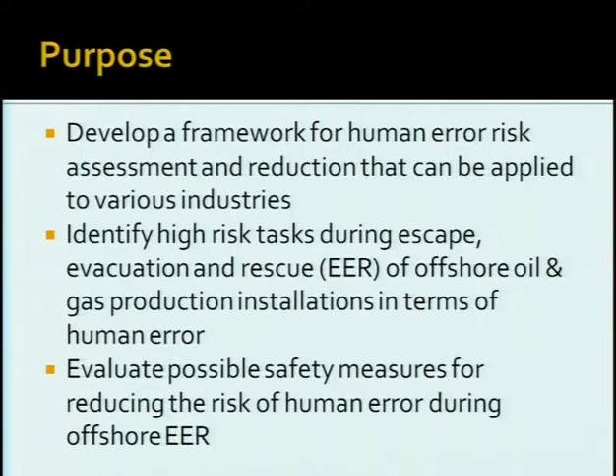And through that research, we've identified high-risk tasks during the escape, evacuation, and rescue process, the EER process, of offshore oil and gas production in terms of human error. We've also included a tool to evaluate potential safety measures for reducing the risk of human error during the offshore EER

process. So the escape phase of EER we've defined as the time of the initiator, be it a hydrocarbon release or a fire and explosion, until arrival at the temporary safe refuge or muster point. The evacuation phase is the time of the offshore installation manager's decision to leave the rig until a safe distance has been achieved from the platform. And rescue is the time of recovery actions from rescue personnel on nearby vessels.

Now, these three phases can coexist at the same time. For example, in the escape phase, if an individual who is moving toward the temporary safe refuge determines that there's no longer a safe path, they can initiate the evacuation phase for themselves and move towards evacuation.

And indeed, the rescue process can occur as soon as the initiator occurs and the escape phase has begun, just to prepare for any individuals that will be evacuating to sea or prepare helicopters for helicopter evacuation.

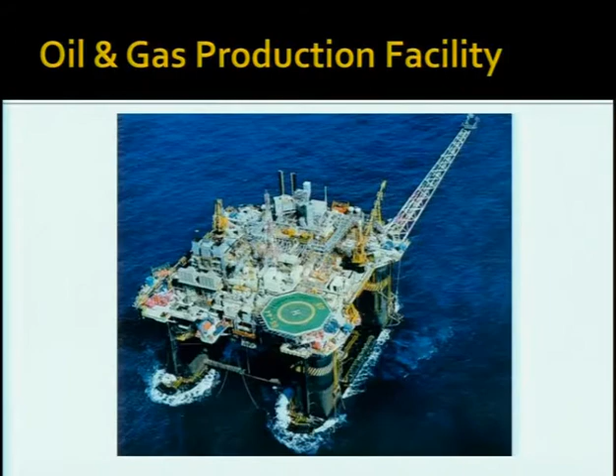So in the human reliability analysis model, the first step is to identify the emergency tasks that personnel must complete and scenarios that may occur. When these scenarios and tasks are identified, then you determine the human error probability for each task, as well as the severity of any consequences of an error.

You combine the human error probabilities and consequences in a risk matrix to determine the tolerability of risk, and then a risk graph will determine the requirements of any safety measures, or safety barriers as they're also called, in order to effectively reduce the risk.

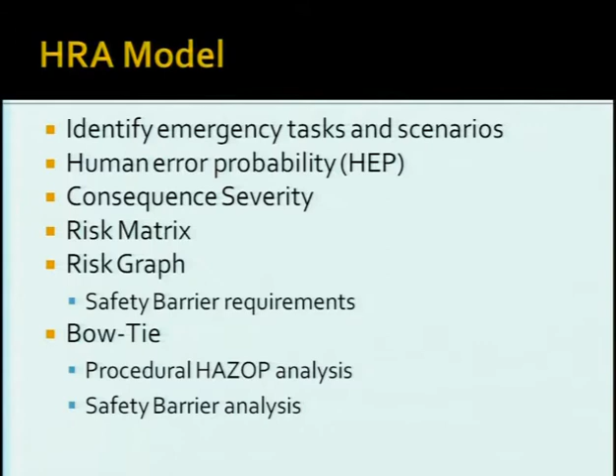As you can see, the first step is to choose your initiator, be it a gas release or a fire and explosion. So basically choose your scenario. And the second step is to choose your task to be evaluated. And conjointly, you determine the human error probability and consequences, and they combine together in the risk matrix.

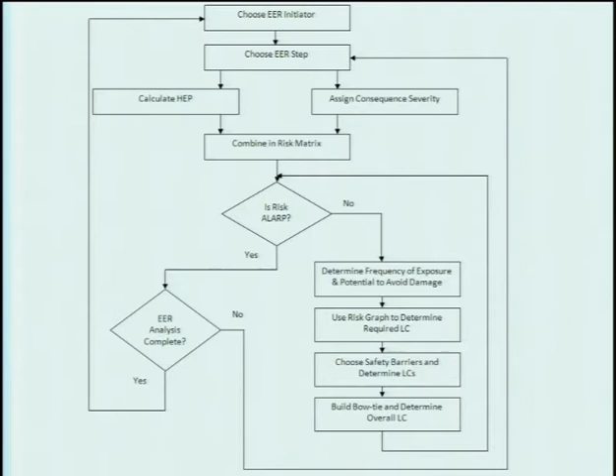Now, in the risk matrix, you determine if the risk is at a tolerable level. We use the as low as reasonably practicable principle, which I'll explain later. If so, then you move forward to the next step and just continue through your scenario and task analysis. If the risk does need to be reduced, then there is a separate risk reduction methodology included.

So to identify the tasks and scenarios, we use the hierarchical task analysis tool, which identified emergency procedural tasks for personnel. The hierarchical task analysis starts with the end goal. In our case, it was the end goal of escape, the end goal of evacuation, and of rescue. And then they're divided into smaller tasks that can be more detailed and evaluated for human error probabilities.

Scenarios have to be plausible scenarios. They have to be reasonable scenarios that could happen at the facility. And they have to encompass all levels of emergency situation, from minor emergency to major emergency.

So the evacuation tasks in specific were divided into different means of evacuation. You have a bridge link to other platforms, helicopter evacuation. You have a motor-propelled lifeboat, the totally enclosed motor-propelled survival craft, TEMPSC for short. You also have floating life rafts, or individuals, if there are no other means available, can jump directly into the sea with survival suits.

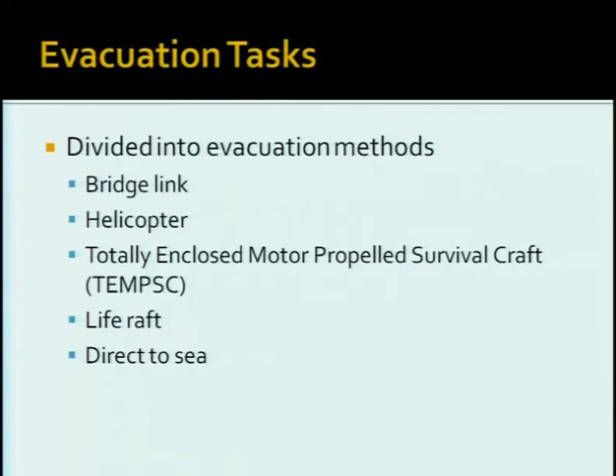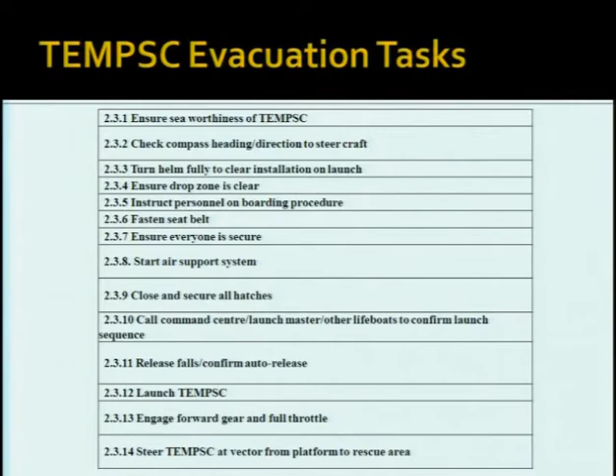Now this is just a breakdown of the specific motor-propelled lifeboat evacuation tasks, just to give an idea of the detail. You can notice one step is individuals must fasten their seat belts. Another is all hatches must be closed and tightly secured. So this just gives an example of some of the types of tasks, whether they be simple actions or cognitive tasks. Just the detail that can be gone into for determining human error probabilities and for consequences of errors.

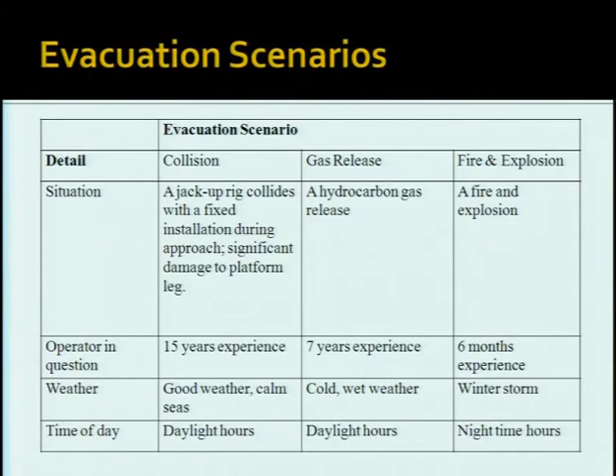Now, the human error probability we evaluated as the probability of an error in a group of people when a specific task is attempted. This is analogous to if you look at the emergency escape, evacuation, and rescue process as its own safety measure or layer of protection, then the probability of failure on demand is the human error probability.

Human error probabilities can be evaluated through reliability data. There are some databases available with generic data that need to be made facility specific to get a more realistic view of the risk. One method of getting facility specific data and scenario specific data is using expert judgment techniques. Two of which I'm going to talk about are the success likelihood index methodology and the human error assessment and reduction technique, also known as HEART.

So SLIM, the success likelihood index methodology, was used in the analysis of the escape phase, and HEART was used in the analysis of the evacuation phase. SLIM is a resource-intensive method. It requires multiple experts and assessors to generate one set of data. And HEART is more resource efficient, designed to be used by a single assessor to come up with a complete set of human error probability data.

SLIM has some minor calibration involved, and HEART calibration is an issue. It doesn't have its own internal calibration. In SLIM, each of the multiple assessors, all of their data combines for one set of results. So there's statistical analysis involved, and it becomes a less conservative technique, but perhaps a more robust technique.

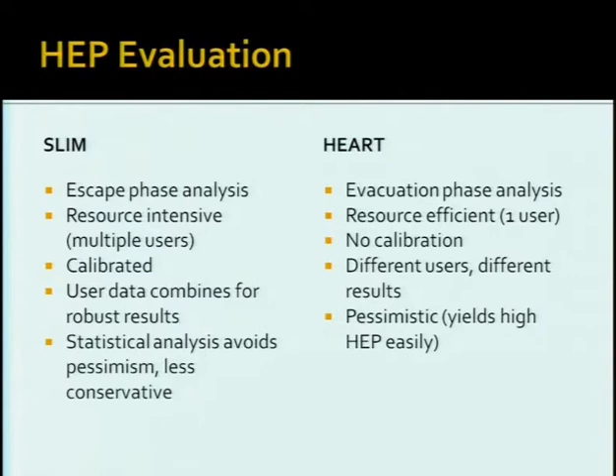Now, there are 4 categories. There are also 4 levels of severity, 1 to 4, 1 being the lowest and 4 being the highest, ranging from 0 effect to fatalities, or prevents other individuals from having a dry evacuation, from evacuating without having to go directly into the sea. Now, for the evacuation phase, only the health category is considered. They have the same severity levels, but the other 3 categories aren't included for evacuation.

Consequence severities were determined from previous incident data, from major investigations through industry in past years. The escape phase, it was determined, was very dependent on the initiator, whether it be a hydrocarbon release, a fire and explosion. Man overboard scenarios were also analyzed in the escape phase.

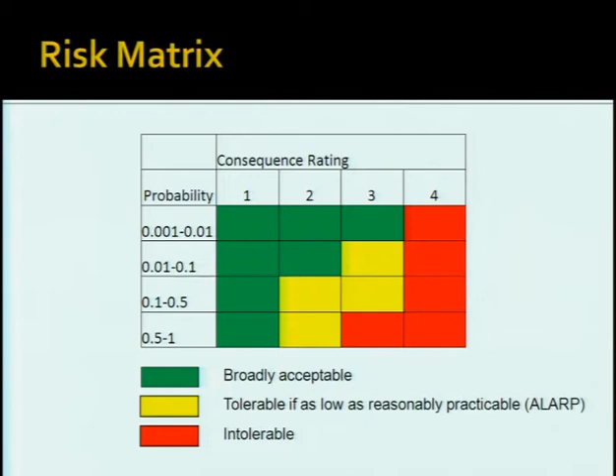So in the escape phase, as can be expected, the highest risk tasks were determined for the fire and explosion scenario, which is the most severe scenario. Most urgency is required. The lowest risk for the escape phase tasks was determined for the man overboard. Indeed, the muster to a temporary safe refuge had little effect on consequences for a man overboard scenario.

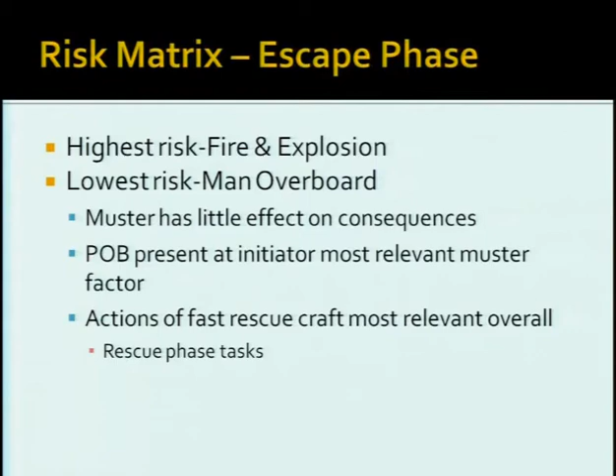There are tasks involved in the escape phase that include providing aid to others as necessary or as directed. So that task in the escape phase analysis becomes very important for a man overboard scenario, especially for the personnel who are present when the individual falls overboard. The other important phase for a man overboard scenario, of course, is the rescue phase tasks.

Now, for the evacuation phase, the highest risk tasks involved movement in the sea, whether it was by the motor-propelled lifeboat, by the life raft, or by swimming in the ocean. Also, high-risk tasks included releasing of the motor-propelled life craft, avoiding damage, avoiding being washed up against the installation legs.

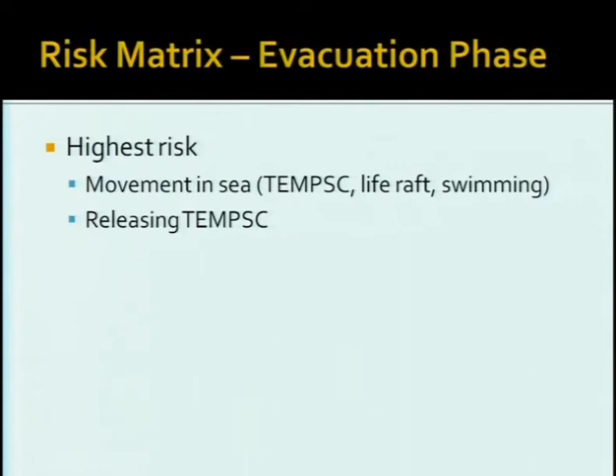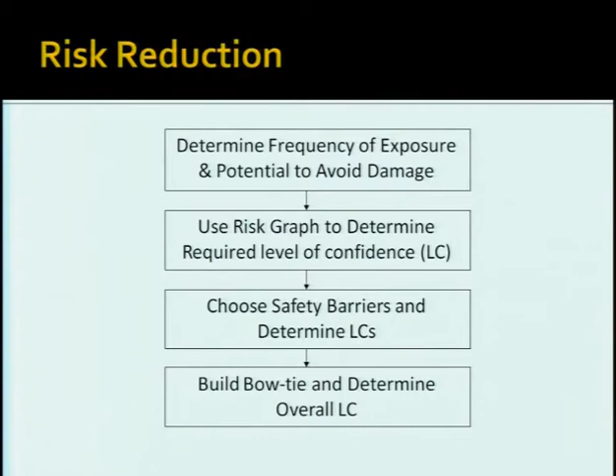When you determine the required level of confidence of any safety measures for specific tasks, then you look at your available safety measures and you evaluate their reliabilities, their level of confidence. When you've done that, you build your bow tie graph and determine your overall reliability, or overall level of confidence for all of the safety measures incorporated for that one task.

Now, the risk graph concept is taken from the Accidental Risk Assessment Methodology for Industries, ARAMIS. This was developed as a response to the Seveso II directive in Europe. It was developed across Europe, and it follows the conclusions from the risk matrix. So the risk graph and the risk matrix can work together. The risk graph determines the reliability of any safety measures in order to bring the risk into the yellow region of the risk graph, the tolerable if ALARP state.

Now, the reliabilities or level of confidence of safety measures can range from 0 being the lowest and 4 being the highest. A level of confidence of 4 rarely occurs in industry. So the analysis of safety measures, safety barriers, produces the design level of confidence for that safety barrier, be it a blast wall, an automatic shutdown mechanism, an automatic sprinkler system. Now, the design level of confidence is the level of confidence at the time of a proper installation of the safety barrier and a routine maintenance plan.

Further, a safety audit must be performed to determine the actual level of confidence of the safety barrier in question. The safety audit yields an index which is included in the evaluation of the safety barrier. The safety audit and safety management system audit follows the principle that safety culture and safety management system affect risk control at a facility. And it also helps reduce any gaps between real and perceived risk at a facility.

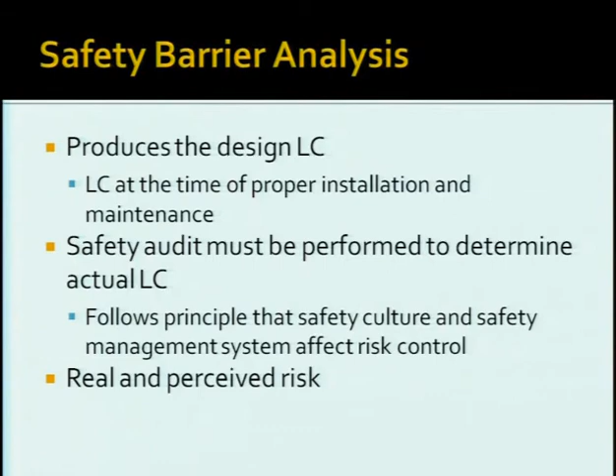Now, in later stages, you look at the consequences, and then you determine the safety measures that can be used to prevent this from occurring. Now, one of the ideas in the current research was to take the potential safety measures and divide them into categories of prevention barriers, which are any safety measures that can be used to reduce the probability of an error occurring, and mitigation barriers, which can help control the consequences should an error occur.

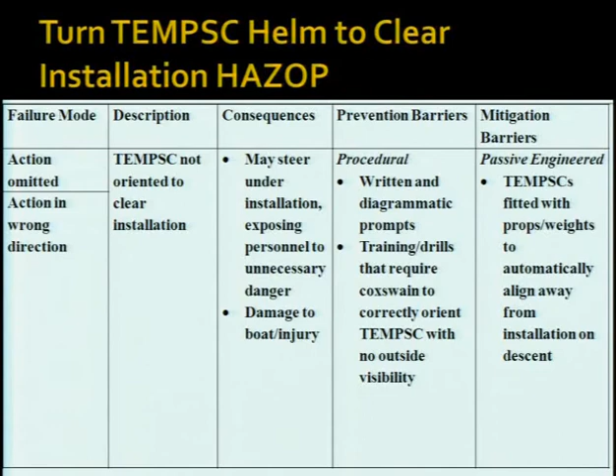We've also divided any safety measures according to the hierarchy of controls. So inherent safety measures, passive engineered safety measures, active engineered safety measures, and procedural safety measures. This also helps in determining the potential level of confidence of these barriers as well.

An individual does not take the time to return the process equipment to a safe state. The individual partially does, but then leaves before necessary. An individual takes too much time, as time is a factor in the EER process. The individual takes too much time to return process equipment to a safe state and exposes themselves to unnecessary danger.

And should an error occur at this stage, it was determined that the consequence severity was the most severe, level 4, and should any safety measures be included, it can be reduced to a less severe consequence severity, level 3, which still results in the potential for a severe injury.

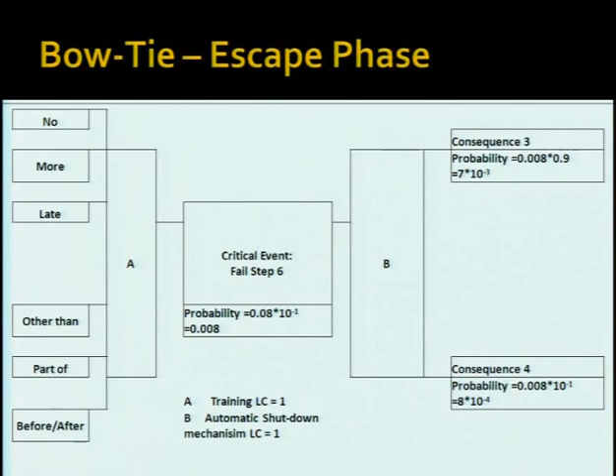And in this way, even though you still have a possibility of a fatality, you have greatly reduced the risk from its original state. And you can bring risks into a tolerable, if ALARP, state using the risk reduction principle.

So from the research, we've developed a framework to evaluate and reduce the risk of human error. We've incorporated the hierarchy of controls, inherent safety, engineered safety, procedural safety, into the procedural HAZOP and risk reduction, as well as the bow tie classification of prevention barriers and mitigation barriers. And we've combined different risk assessment techniques, like HART or SLIM, for example, with a comprehensive risk reduction technique in ARAMIS to create a more comprehensive technique for risk assessment and reduction.

So in the future, we're looking at further validation of the current tool. The escape phase validation has been completed using a case study. The evacuation phase validation is currently in progress. Following that, complete analysis of the rescue phase, which was not included in the current work. So we're going to analyze for human error probability, consequence analysis, and again, risk reduction measures.